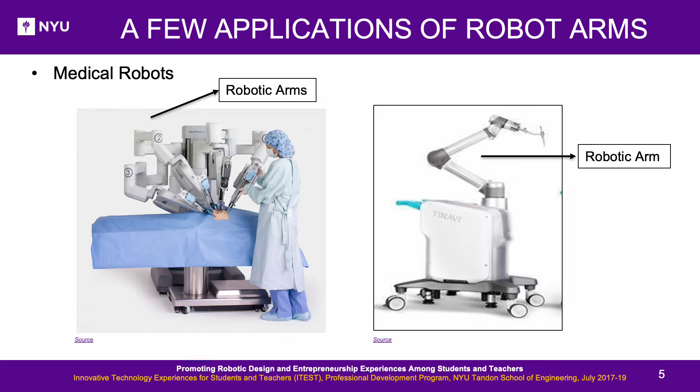In the automobile industry, the robot arm can realize the welding on the body of a car. They are used in chassis development or car assembly.

This is the domestic robot, which is produced by Moley Company. The robot can cook a customized dinner for the master. This is a food industry application.

In space, rovers such as Curiosity are used to explore the surface of Mars. Space manipulators are also used in repair and maintenance of spacecrafts.

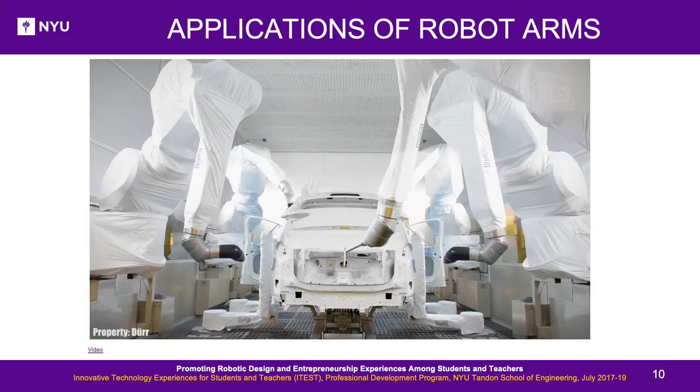Amazing new generation robots are used for the production of vehicles, the manufacture of composite materials, or distribution in logistics centers. These are the 10 most amazing industrial robots in the world.

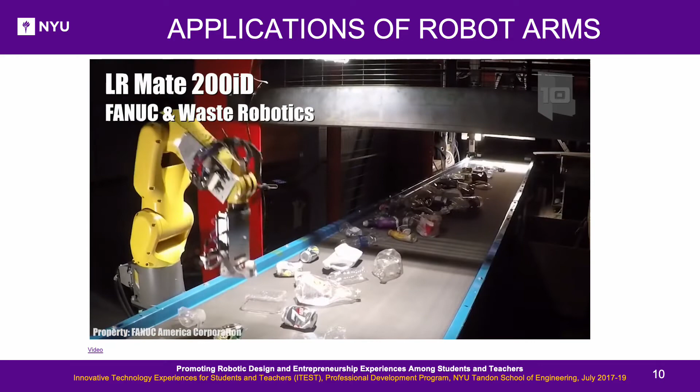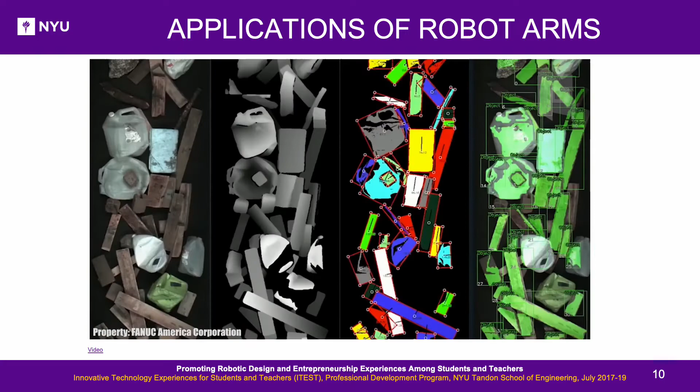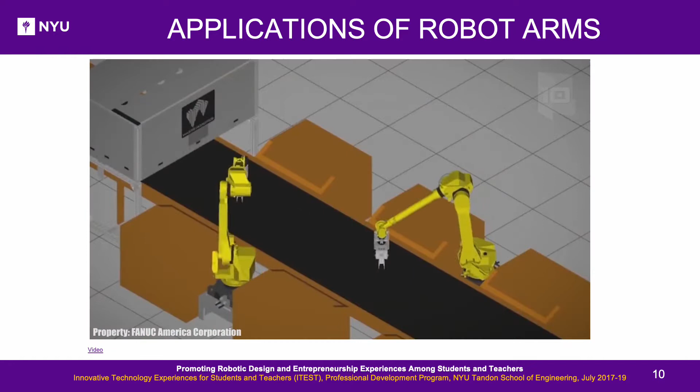LR-Mate: it is a robotic arm that is used for waste recycling tasks. The Fanuc company has created this technology in collaboration with the Waste Robotics company. New software scans and recognizes waste to classify them in different containers. The artificial intelligence of the robot allows it to perform the work automatically. This type of software allows sorting waste with multiple robotic arms at the same time.

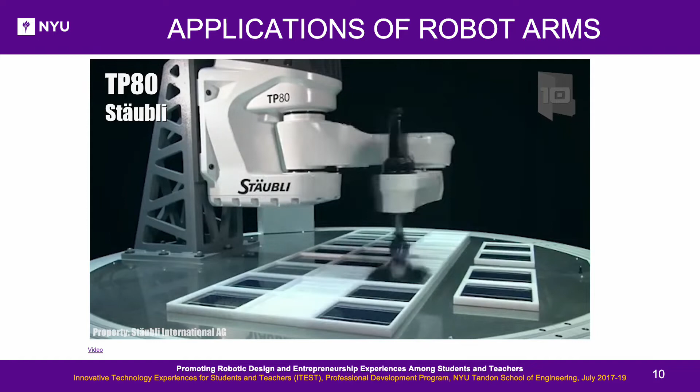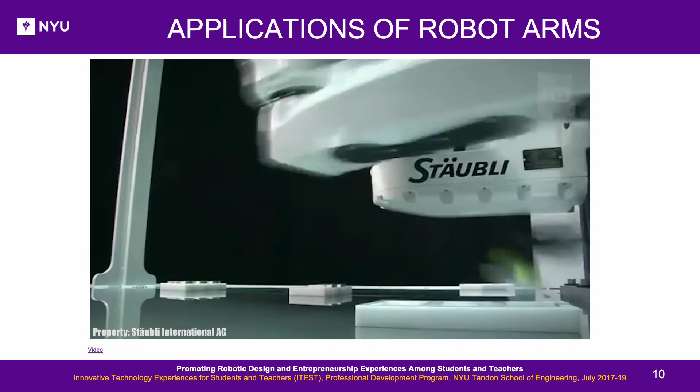TP-80: it is an extremely fast robot that has been designed to perform operations with small objects. It can be used in various sectors for handling food, pharmaceutical products, or other objects. The size of its arm allows it to work in small environments and has a range of 31 inches. It can load up to 2 pounds and carry out 200 operations per minute continuously.

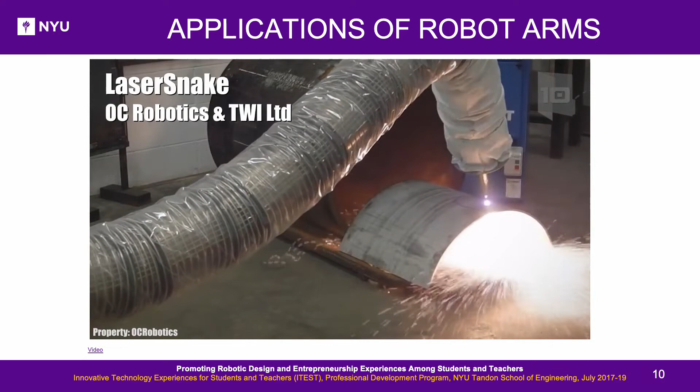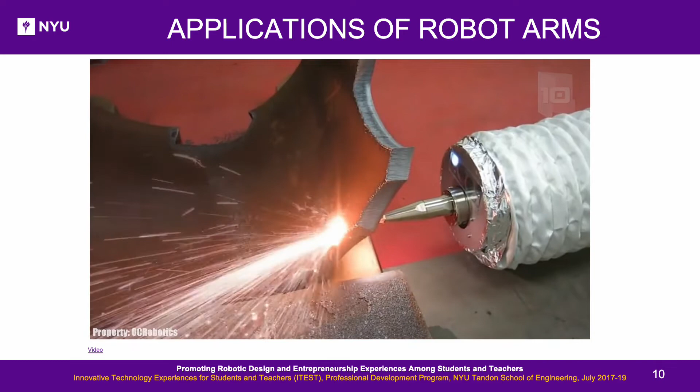LaserSnake: it is a laser cutting robot that is used to dismantle facilities safely. Its flexible arm is designed to reach hard-to-reach places through small holes. It works remotely controlled and can be installed quickly anywhere. Its high-power laser can cut thick layers of steel and maneuver inside confined spaces with great precision.

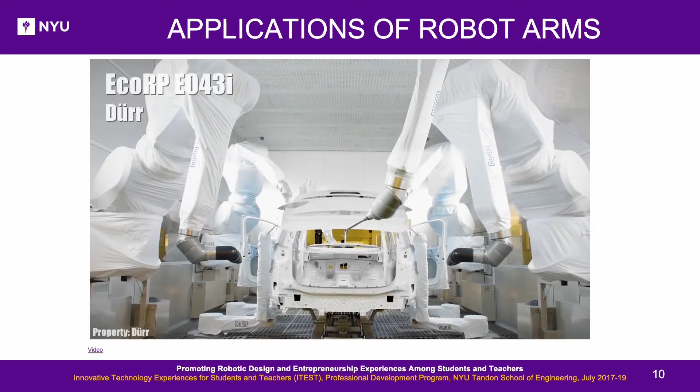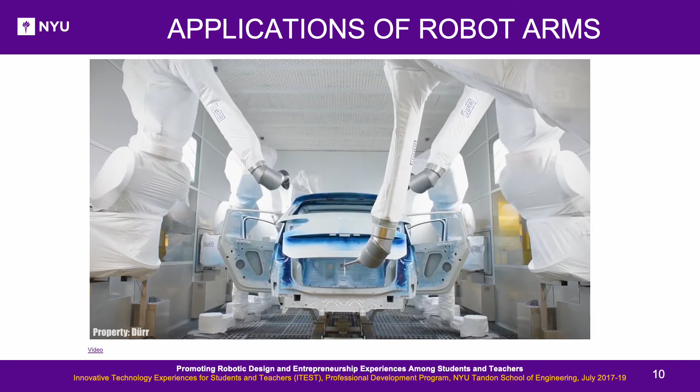EcoRP: it's a third-generation paint robot with 7 axes that is used to paint vehicle bodies. It is equipped with multiple sensors and has great mobility and flexibility. Its design allows it to reach areas of difficult access, such as the interior of the vehicle. At present, many of the leading vehicle manufacturing companies use these types of robots.

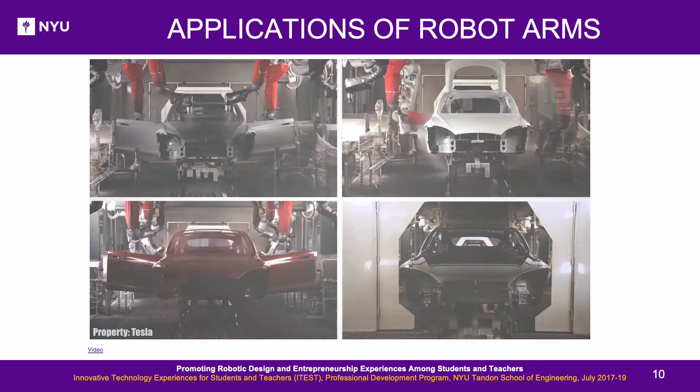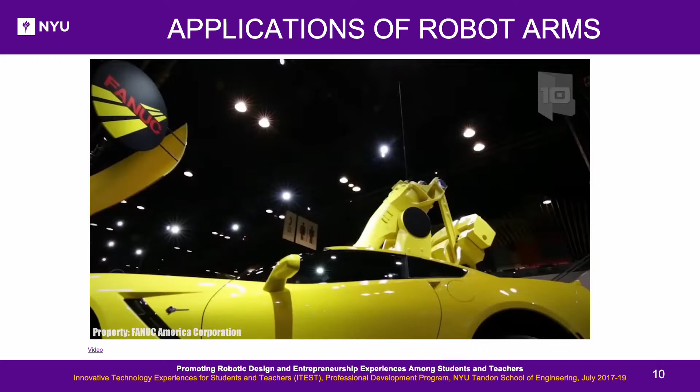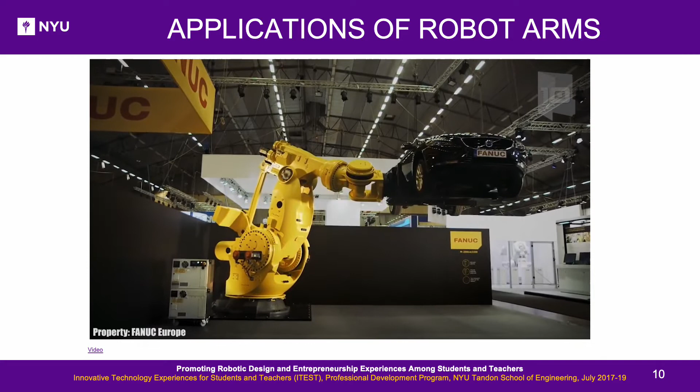M2000iA: it is the strongest robotic arm in the world and can lift loads of up to 5,000 pounds. It is used to lift heavy loads such as vehicles or large machine parts. It is equipped with a vision system that allows it to identify and handle different types of objects. It can move and place objects within a large work area with a high degree of accuracy.

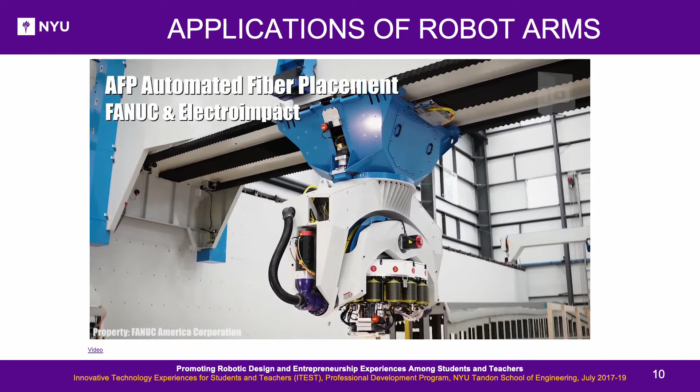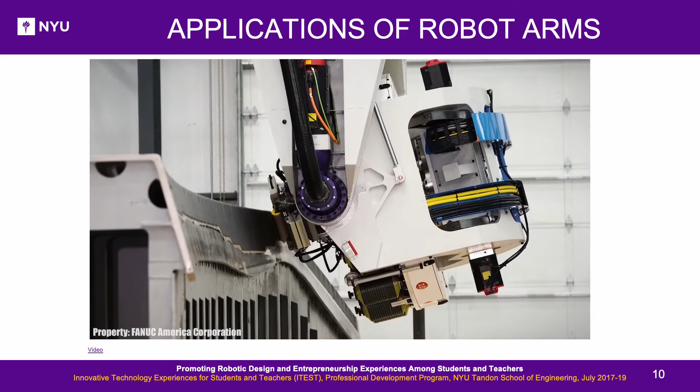AFP: it is a new robot that places fibers automatically in pieces that are used in the aerospace industry. It's used to manufacture composite structures such as pieces of aircraft. It is equipped with carbon fiber coils and works by placing layer after layer on the pieces with great precision. This robot allows the manufacture of highly customized parts, making the process controllable and repeatable.

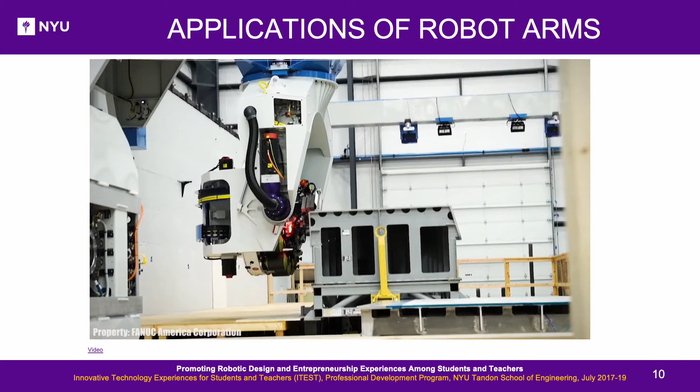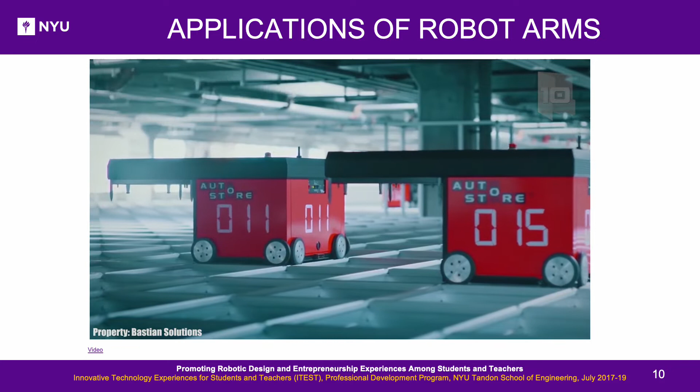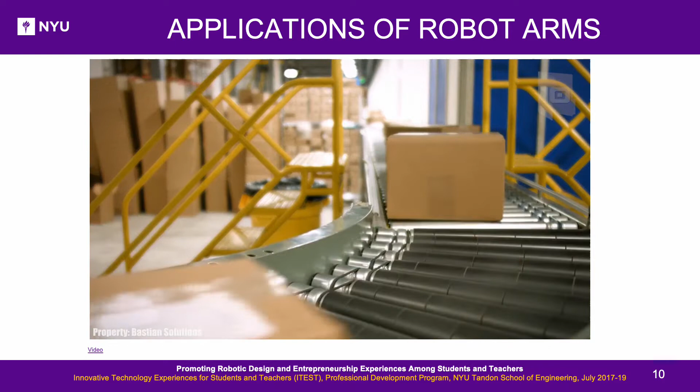AutoStore Blackline: it is a new type of logistics robot that is used for product storage. It works by scrolling through the top of a structure while stacking containers with products. Afterwards, the robot picks them up again so that they are packed and shipped to customers. This type of robot can deliver up to 650 containers per hour and work in groups 24 hours a day.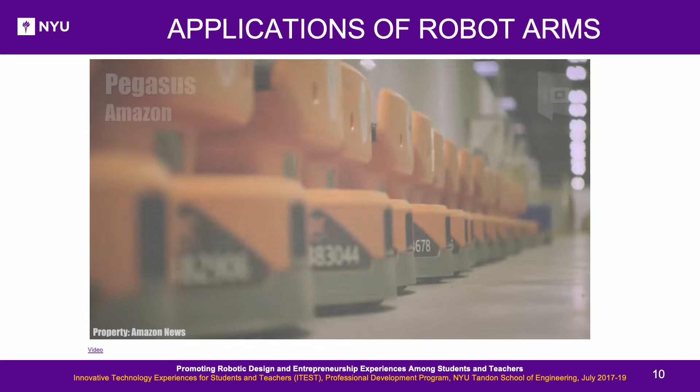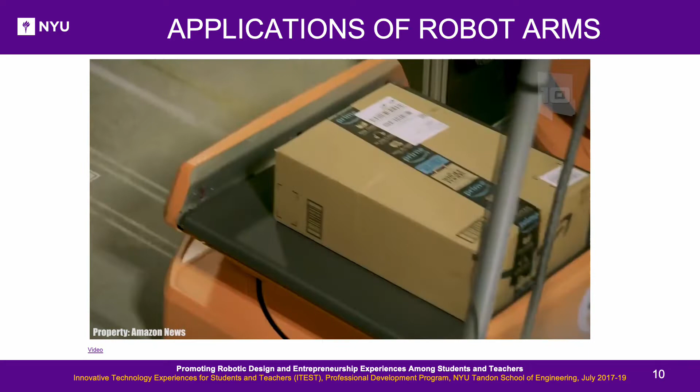Pegasus: it is a new Amazon robot that is used to transport boxes through its logistics centers. It works by collecting the different types of individual packages and taking them to the conveyor belts associated with their destination. The use of these robots allows it to accelerate the time of preparation of the orders and improve the efficiency in the distribution process.

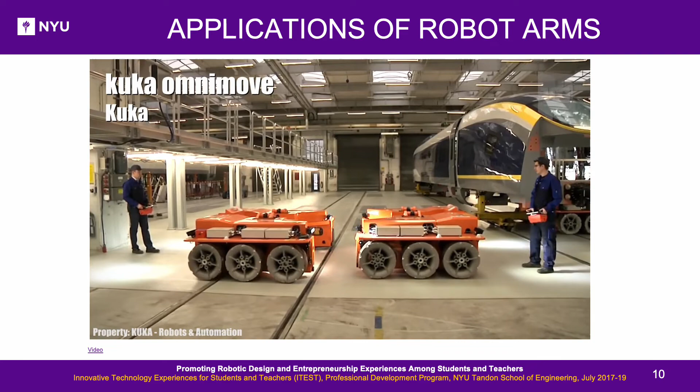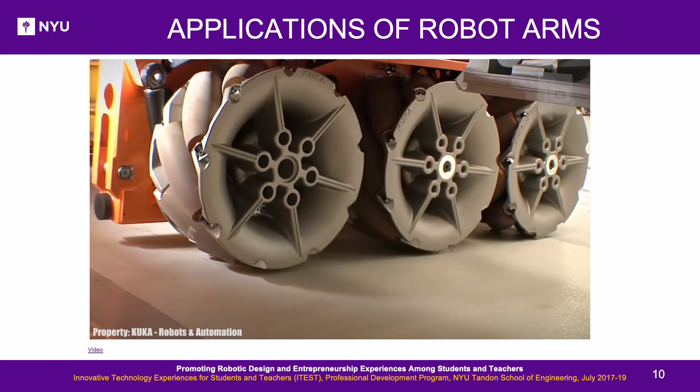KUKA OmniMove is a robotic platform used to transport heavy loads such as trains or airplanes. It uses omnidirectional wheels that allow it to move in any direction, even in tight spaces. It can be controlled manually from anywhere or operate autonomously, with great precision and can carry loads weighing up to 90 tons.

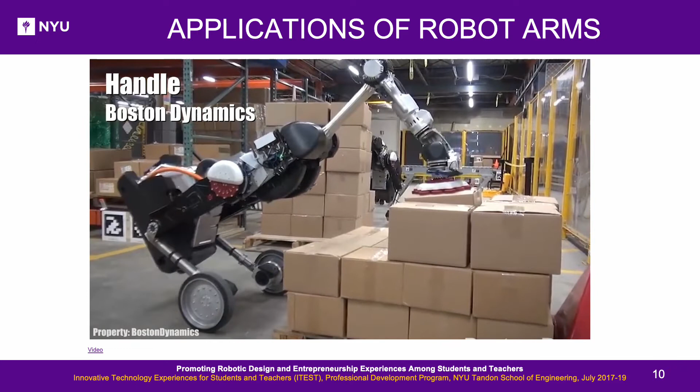Handle is designed to palletize merchandise in warehouses autonomously. It can move boxes of up to 33 pounds at a speed of 13 feet per second. It uses vision-based software with a deep learning system to identify and locate the boxes, and can work with other robots, moving up to 360 boxes per hour.

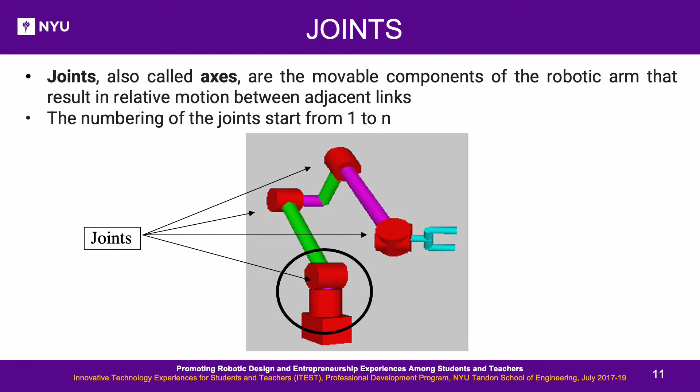Joints, also called axes, are the movable components of the robotic arm that result in relative motion between adjacent links. The numbering of the joints starts from 1 to n.

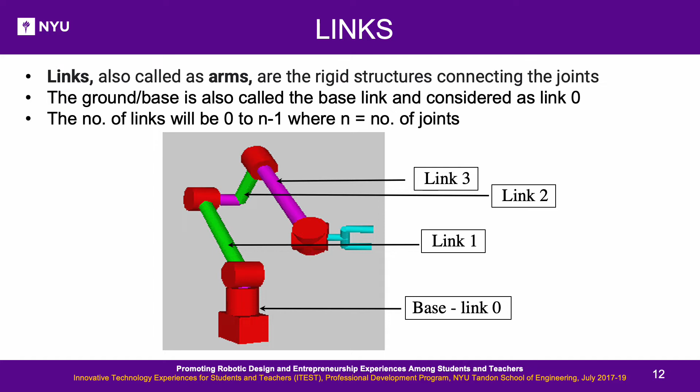Links, also called arms, are the rigid structures connecting the joints. The ground or base is also called the base link and considered as link 0. The number of links will be 0 to n-1, where n equals the number of joints.

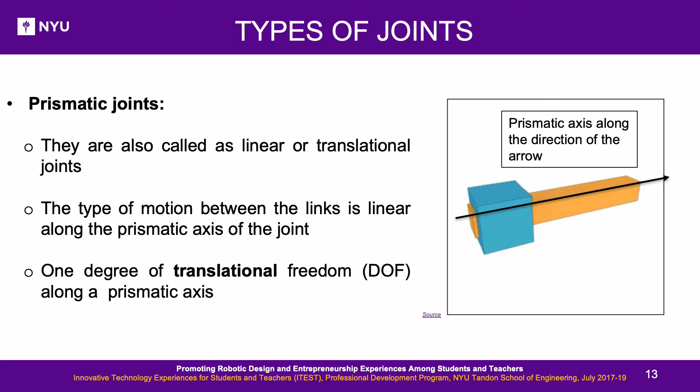Prismatic joints are also called linear or translational joints. The type of motion between the links is linear along the prismatic axis of the joint, with 1 degree of translational freedom along that axis. The link is supported on a linear slider bearing, and linearly actuated by ball screws and motors or cylinders.

Revolute joints are also called hinge joints, which allow rotation along a single axis, with 1 degree of rotational freedom about a revolute axis. They are often driven by electric motors and chain, belt, or gear transmissions, or by hydraulic cylinders.

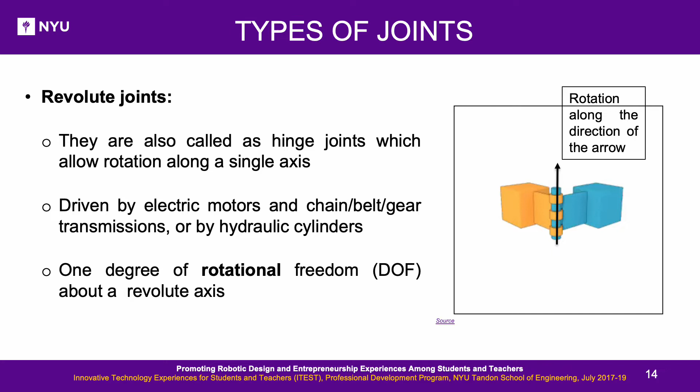Helical joints are also called screw joints. Its motion is similar to a screw motion, which rotates freely but cannot translate freely, restricting its translational motion, giving 1 degree of rotational freedom along the axis.

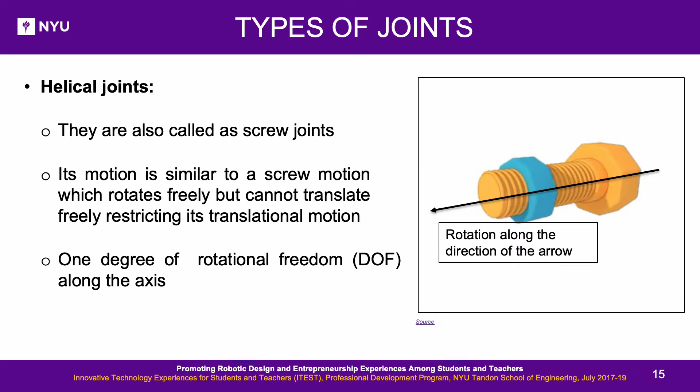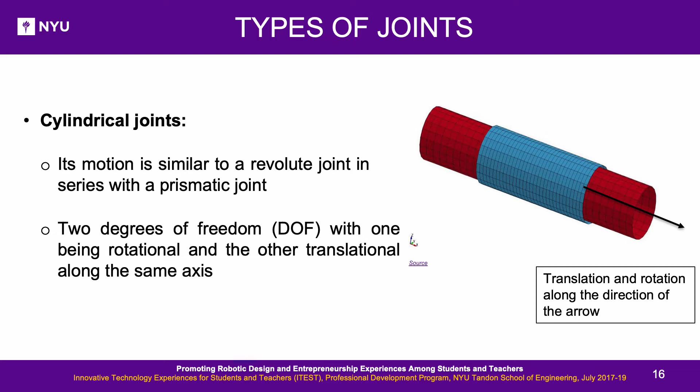Cylindrical joints have motion similar to a revolute joint in series with a prismatic joint, giving 2 degrees of freedom, with one being rotational and the other translational along the same axis.

Spherical joints are also called ball and socket joints. They consist of 3 revolute joints intersecting at a point called the pivot, with rotation in 3 directions, giving 3 degrees of rotational freedom about the pivot point.

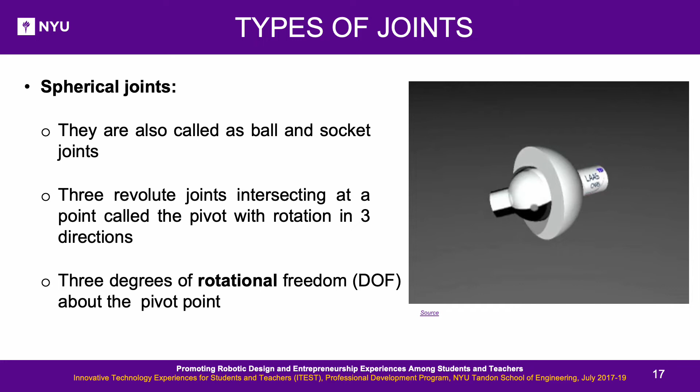Universal joints are also called universal coupling or Hooke joints. They consist of 2 hinges joining at a point at 90 degrees to each other, with their axes inclined to each other, giving 2 degrees of rotational freedom about the intersecting joint.

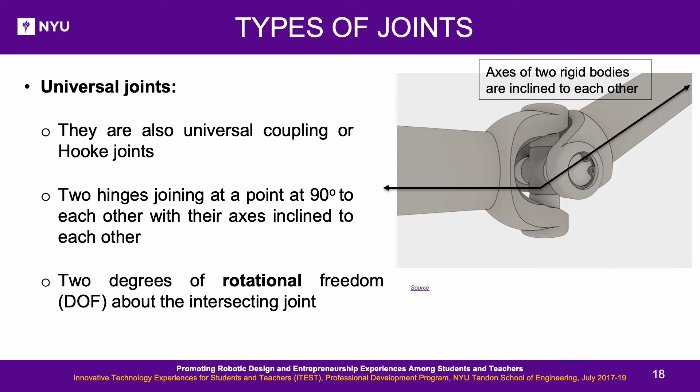Degrees of freedom: what is degree of freedom? It is the number of independent position variables which have to be specified to locate all parts of a mechanism. In most manipulators, DOF is usually the number of joints, including rotations and straight line movements. DOF equals the number of independently driven joints.

The more the DOF, the more the computational complexity. The more the DOF, the more the cost, and the more the flexibility.

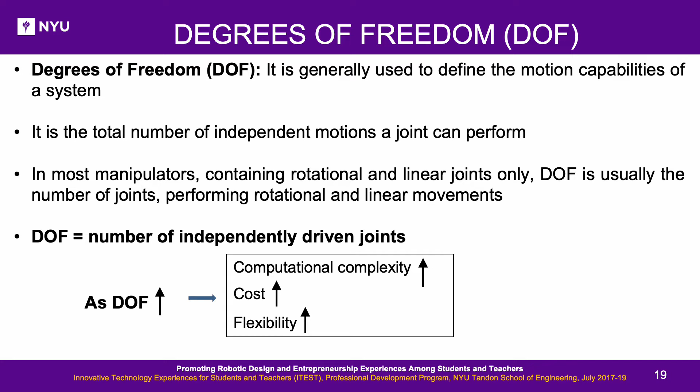For a free body in space, there are 6 degrees of freedom: 3 are for translation, along the x-axis, y-axis and z-axis, and 3 for rotation, which are roll, pitch and yaw.

It is important to know, for a given effector, how many total DOF any given robot has. If there is an actuator for every DOF, then all of the DOF are controllable. Usually not all DOF are controllable, which makes robot control harder. As a note, any free object in 3D space, the hand, a fingertip, a car, a plane, can have at most 6 DOF.

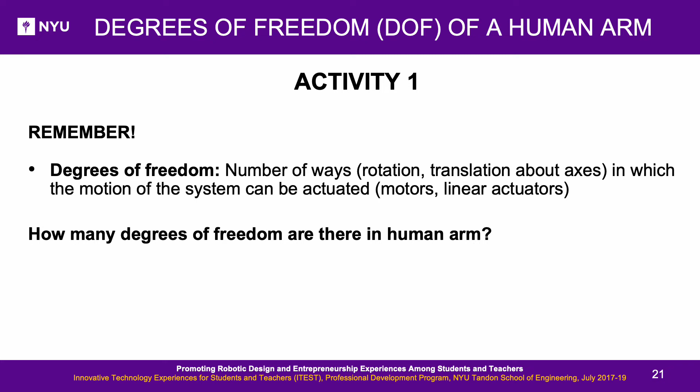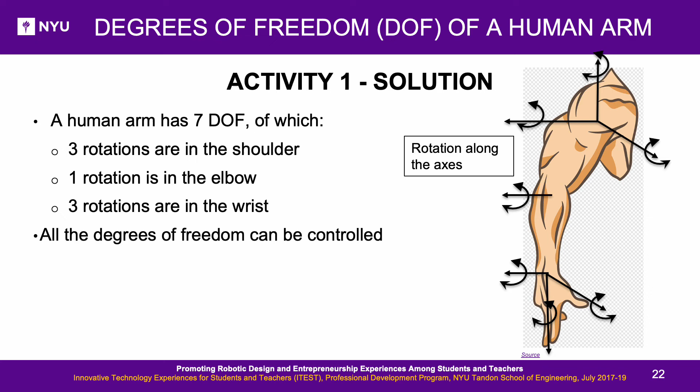Activity 1: How many degrees of freedom are there in a human arm? Degrees of freedom is the number of ways, rotation, translation about axes, in which the motion of the system can be actuated by motors or linear actuators. Solution: A human arm has 7 DOF, which includes 3 in the shoulder, 1 in the elbow, and 3 in the wrist. Remember that a free object in 3D space, the hand or fingertip, can have at most 6 DOF, so there are redundant ways of putting the hand at a particular position in 3D space.

How to calculate degrees of freedom for a robot? The following formula describes how many DOF a robot has.

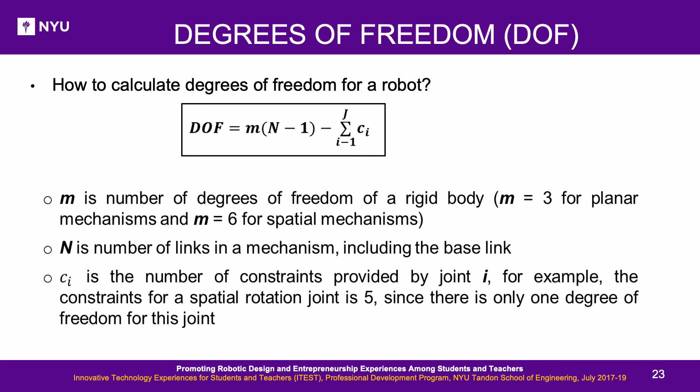Constraints on joints: Joint constraints are used to restrict the relative motion between the 2 components at a joint. They result in the decrease of the degrees of freedom of a rigid body system.

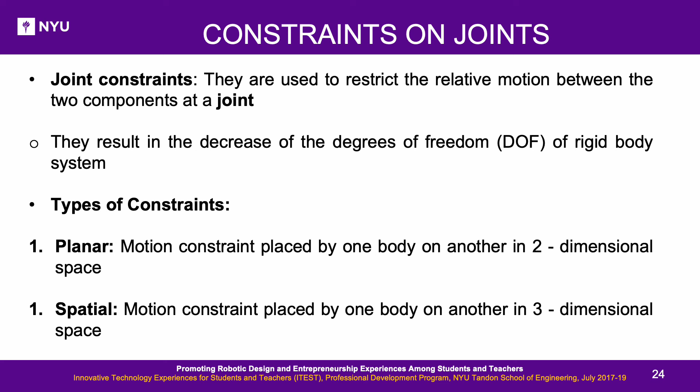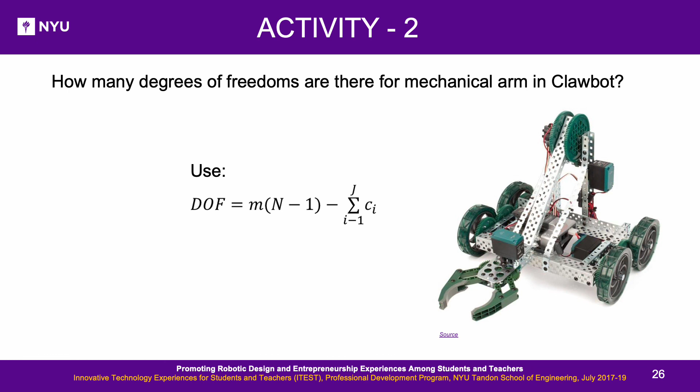Activity 2: Using the formula, calculate how many degrees of freedom there are for the mechanical arm in Clawbot.

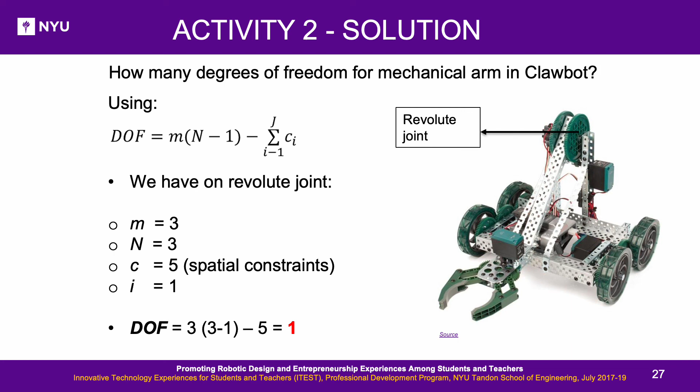Activity 2 solution: Vex Clawbot has only one revolute joint in 3D space. So m equals 3, n equals 3, c equals 5, and I equals 1. Degrees of freedom equals 1.